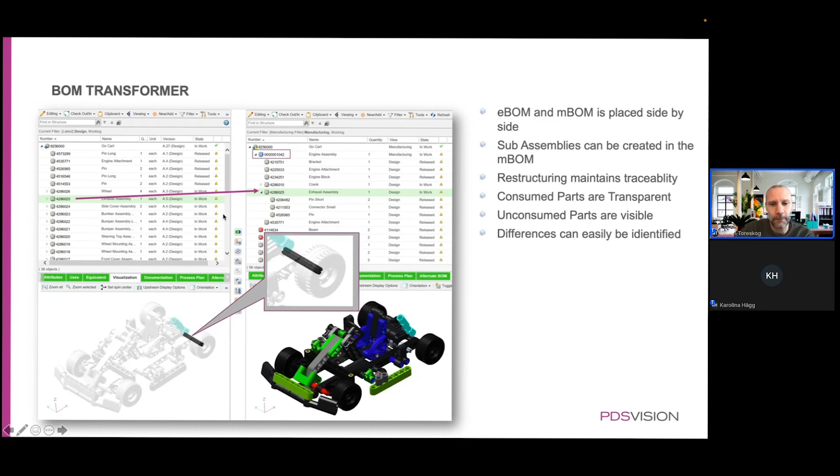Then the process plan. So we leverage the mBOM and have that on the left-hand side here with the visualization. In the process plan, we then add the operations that we want to perform. And then we drag and drop the parts onto the operations. So we have the list of operations, 10, 20, 30, and so on. We have the mBOM on the left-hand side. We drag and drop, and then the parts will show up here, and the visualization will also show up.

When I drag and drop a part, basically allocating a part to an operation, it will be hidden in the visualization, and then I will simply see when I've consumed all the parts, because then it will be empty on the mBOM side.

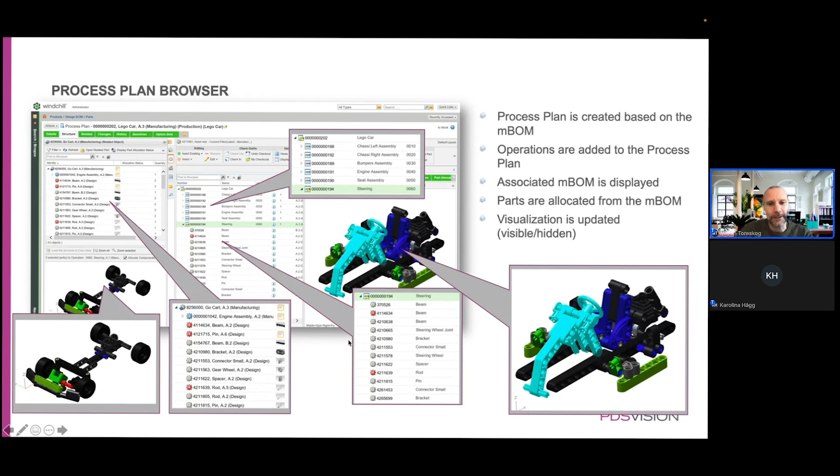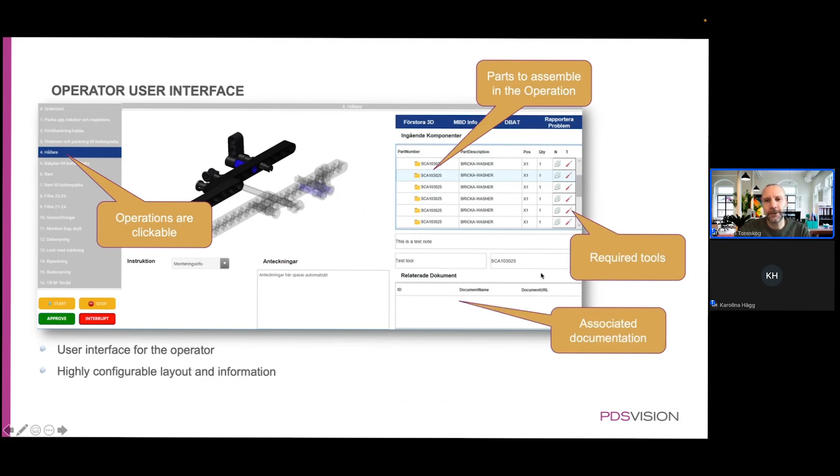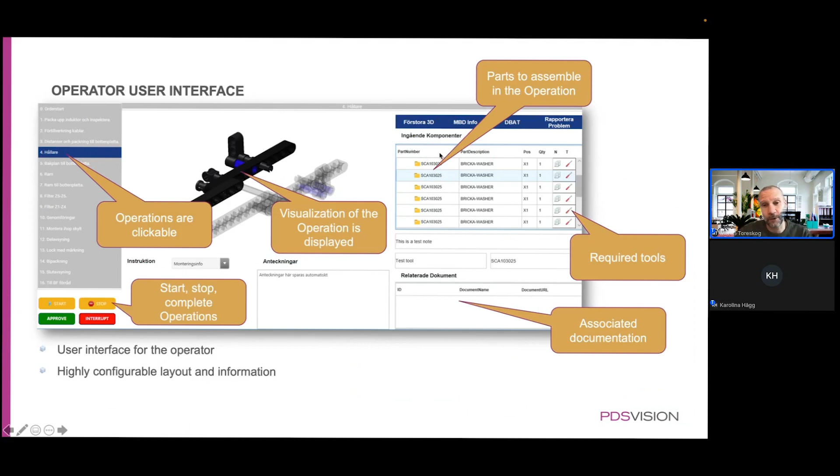The operator user interface. This is a screenshot from ThingWorx, and we have the list of operations that you saw in the process plan. We have the list of parts for each operation. When you click an operation, the visualization will be loaded. You could add required tools for that particular operation. You can have associated documents. You can start and stop the operations, and you can also report problems here. So creating a change notice, for instance, from ThingWorx and start a workflow in Windchill.

So that was the slides. I will now move into the demo part of this session, and I will start by creating an mBOM from an eBOM. So I will use the Lego car that I used during last sessions. I will then create a process plan from the mBOM. I will illustrate some of the operations, and then we'll take a look at the operator user interface. If we have time, let me know, Karolina, if we have time for that. I will also update the eBOM and see how that flows into the downstream processes.

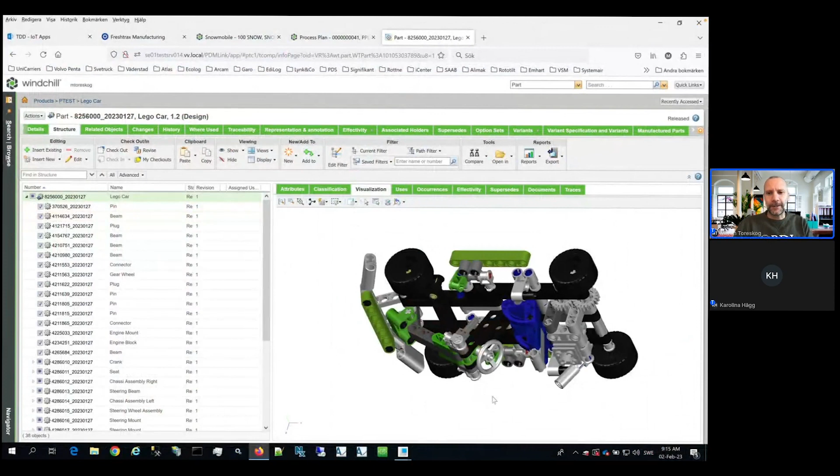So hopefully you can see my Windchill window here. Maybe Karolina, you can just verify that. Yes, it is looking really good. It's a very nice car. Yeah. Yeah, I built it myself.

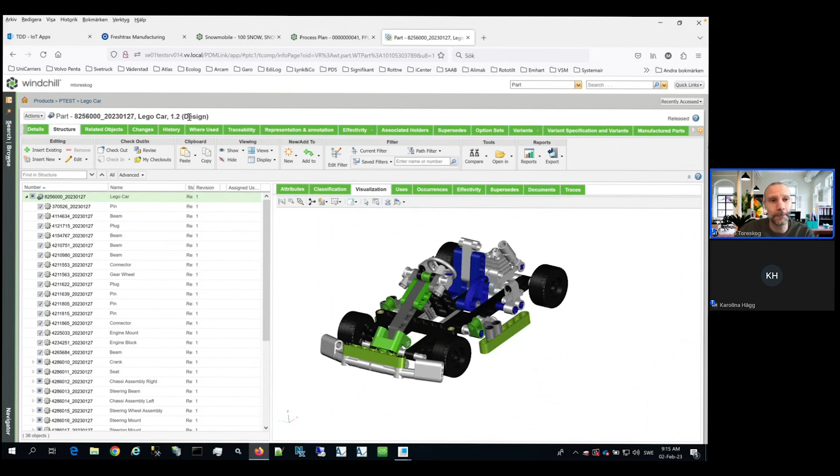So this is the engineering bill of material, and the view here, as you can see, is displaying design. That means that this is the design view of the BOM, which means that it's the eBOM. So I will open this in a separate window, which then allows me to have the eBOM and mBOM side by side. Currently, I don't have an mBOM, so it's empty here, but I have my engineering bill of material, and I have the visualization.

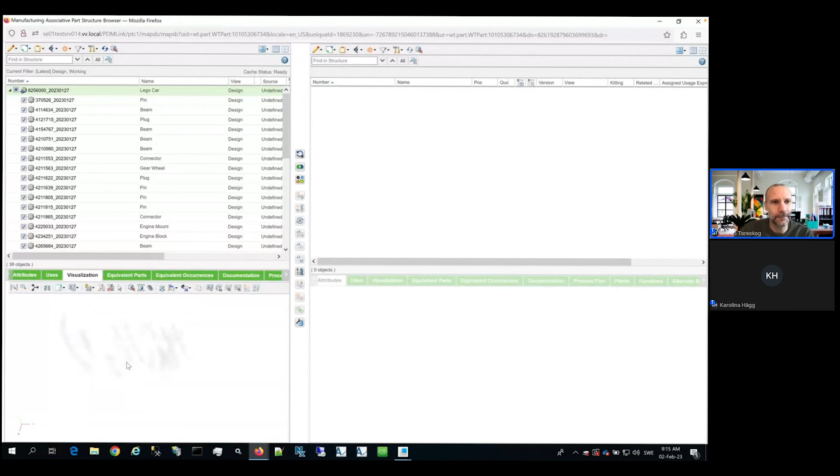If we just wait a second here, and the same thing works here. If I click a part, it will be highlighted in the BOM. If I click a part in the BOM, it will be highlighted in the visualization. So what I'm going to do is right click the top level and say I want a new downstream branch.

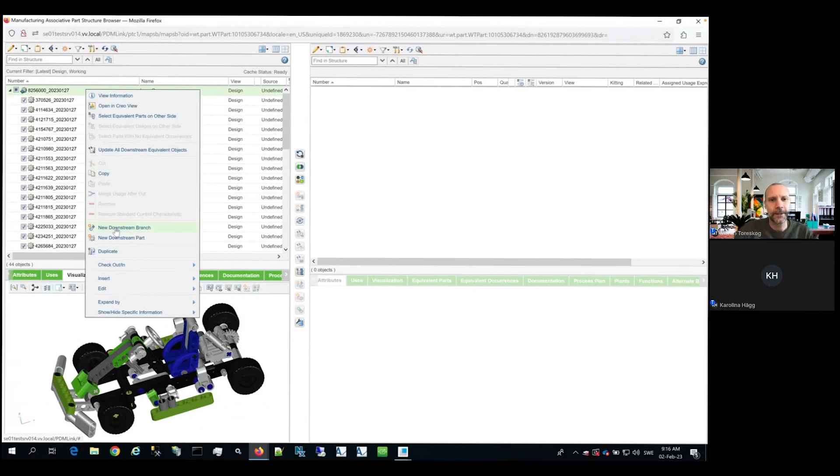Based on my configuration now, I will create a manufacturing view of this. So instead of the design view, I will have a manufacturing view. If I'm working with service bill of material, it will display service here. So I'm creating a different view for service, different view for manufacturing.

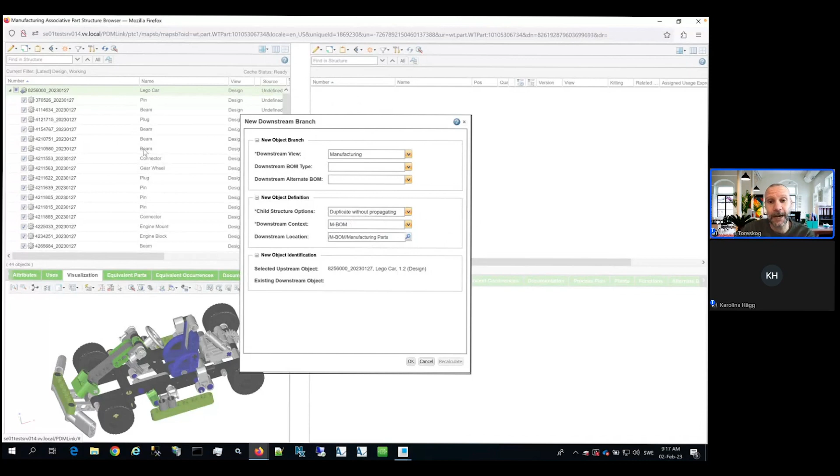When I do this, I have the option to either just create the manufacturing view of my part and skip all the children here. So if I want to completely restructure the bill of material, I can start from scratch, basically dragging and dropping the parts, or creating new parts here and then dragging and dropping from left to right. Or I can start by copying or duplicating the entire structure, which means that I will have an identical structure to start with. And I will actually do that now.

So now I have my mBOM, and as you can see, since I copied the structure, all the parts have been consumed, which means that all the parts are grayed out like this. But on the mBOM side, we can see it's in shaded mode.

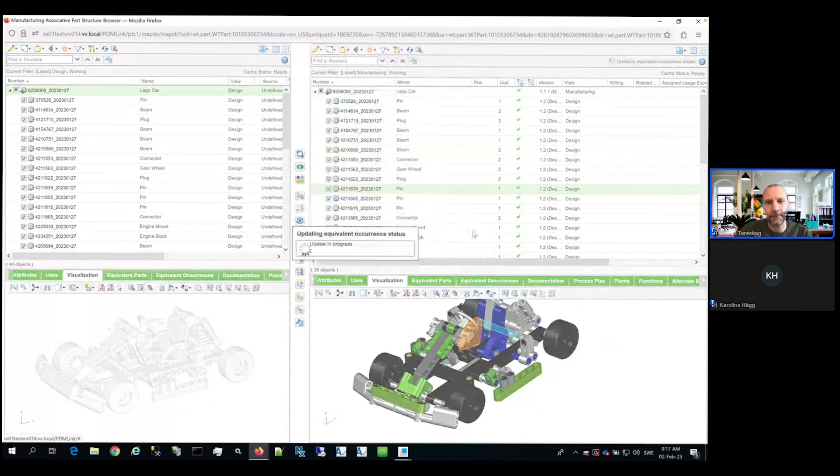So let's imagine that I didn't copy over this part, for instance, or that part has been added after I created my mBOM. So I will simply just remove that part, and we'll see what happens here. So that part simply shows up on this side, which means that this has not been added to my mBOM. So I can click that and then drag that and drop it on top of this one. But I will do a little bit more advanced action here.

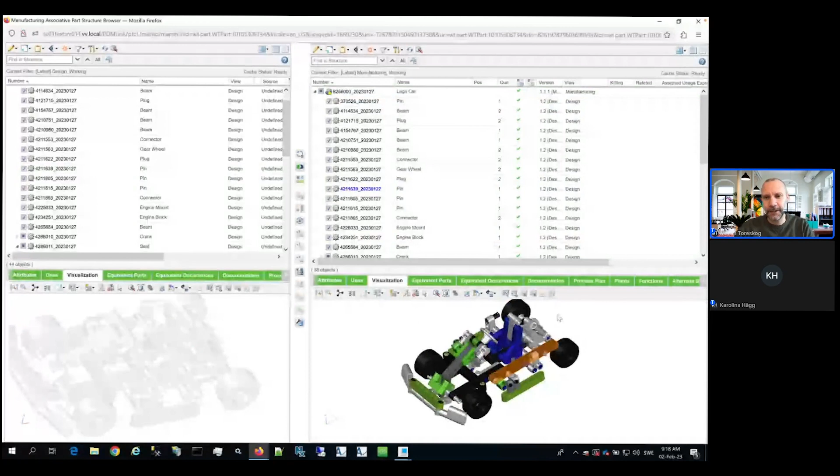So I want to create a pre-assembly of my engine. And as you can see here, the engine block, for instance, is directly below the Lego car. But I want to have that and the exhaust pipe and the crankshaft and so on inside my engine pre-assembly. So I will select my Lego car, insert a new part.

And as you saw in previous sessions, I have different types of parts based on permissions, of course. If I'm a manufacturing engineer, I will probably not have this long list of parts, but potentially only the manufacturing part. So I'll call it engine pre-assembly. And that is then added to my BOM.

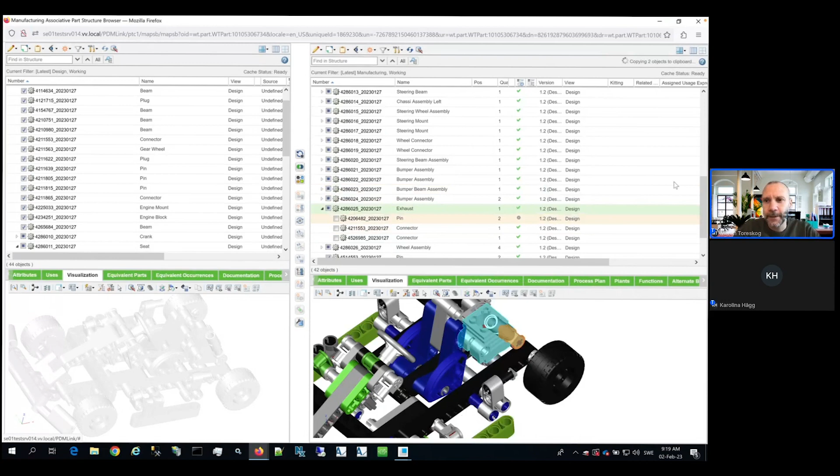As you can see, it doesn't have any children, but what I want to do is then select the engine block, select this part here. Let's see, I want the entire exhaust. So let's grab those. I will cut that from my top level and then right-click my newly created engine pre-assembly and simply paste it there.

When I do this, they're by default hidden, but I can click this to display the parts. If my machine works, now, let me refresh there, and there you can see that they're back. But I will actually deselect those so I can see a little bit more what I want to grab here.

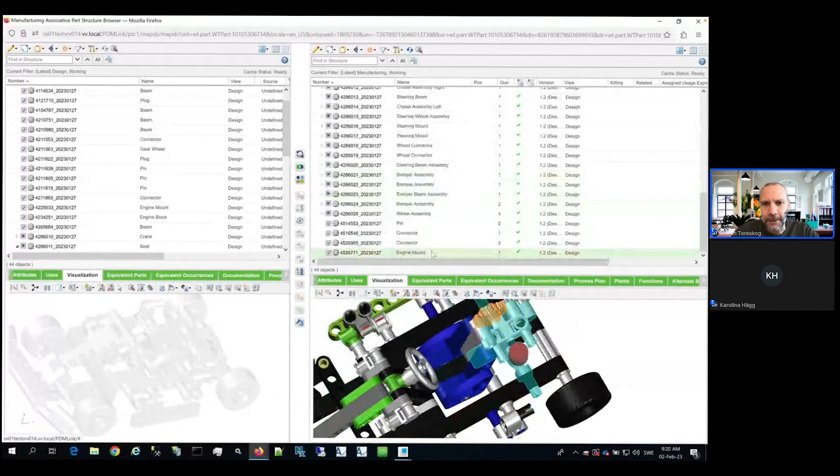So I will take that piston and then take the entire crank, and potentially I want that one, and that one should be included in my pre-assembly. So I will cut that. I can drag and drop them here as well, but I think if it's a long way to scroll, it's easier to do it this way. And then paste it on top of that.

So the purpose of this is, of course, that when I produce the Lego car, I simply take one engine assembly from stock. I don't assemble these on the production line for the Lego car, if we imagine that we would do that. So I would have a process plan for the engine pre-assembly, which defines how to assemble this. And then I would have a process plan that describes how I assemble the Lego car. And then I will use this as an already defined or already assembled component.

If I would select the engine block here, since that has a new parent, it could be interesting to know where that is located on the engineering side. So I can right-click the part and say select equivalent part on other side. So even if I restructure it like this, it still has the traceability that this part is this actual part here.

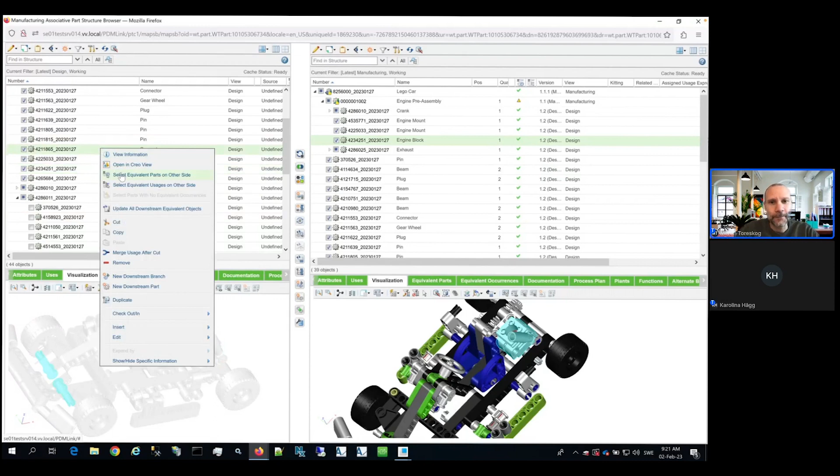And in the same way, if I would select another part here, it will then know where that is located. And this is how it keeps track of the consumption status. So it knows that I have consumed all the parts, and if new parts are introduced on the eBOM side, then I can add those to my mBOM. So I will check these guys in.

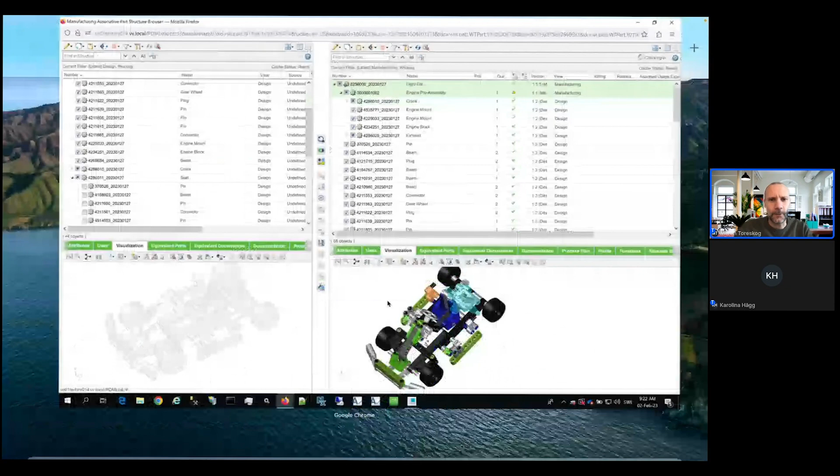So what I did now, if we go back here to the overview, this here was basically the first step. I'm creating the mBOM from the eBOM, restructuring it, but I'm not defining how I do things. This is what I'm going to do in the process plan.

So if I want to create a process plan for the engine pre-assembly, I'm selecting that part. And then I have a process plan tab down here. And then I would have a process plan for the Lego car, of course, to define how that is assembled. So I'm going to create one for the Lego car. Insert new.

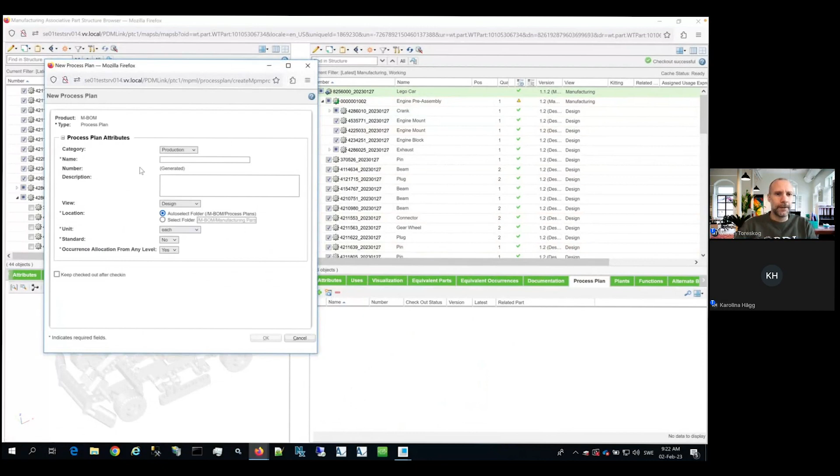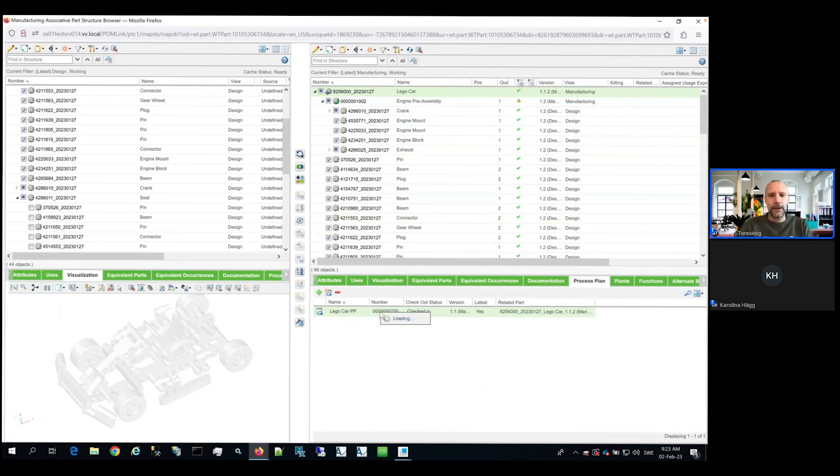Give it a name, Lego car process plan. So now I have my process plan, and as you can see, if I select another part, it will be empty here. So it displays the process plan, or the process plans if you have multiple process plans, for the selected part. And then I will navigate to the information page of the process plan now.

As you can see, it's completely empty. I'm going to open the related part. So by creating the process plan, I associated that to the mBOM. So here I have the mBOM, and if I sort on number here, we should have the engine pre-assembly available here. So my task is now to create operations that define in what order I assemble this.

So we have two types of operation in this configuration, a regular operation and what we call an operation group. So typically in an ERP system, you would not define the operations on the assembly step level, you would have a higher level of operations. So this is what we represent with the operation group.

So let's say that you have different stations or work centers in your production line. That could typically be one operation group. But within that work center or that station, you would perform different operations. So these would be the regular ones. So let's add 4 operation groups. And of course, I don't need to know how many I want. I can create them on the fly as well.

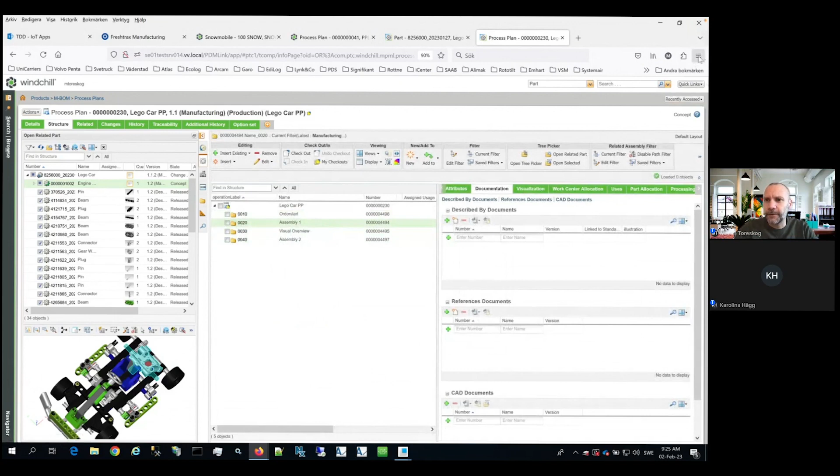I can rename these. So let's rename operations: order start, assembly 1, visual overview, assembly 2, and so on. So let's zoom in a little bit here. So in assembly 1, I want to add the actual assembly steps. So let's say I have 5 steps here. And of course, I can rename these as well.

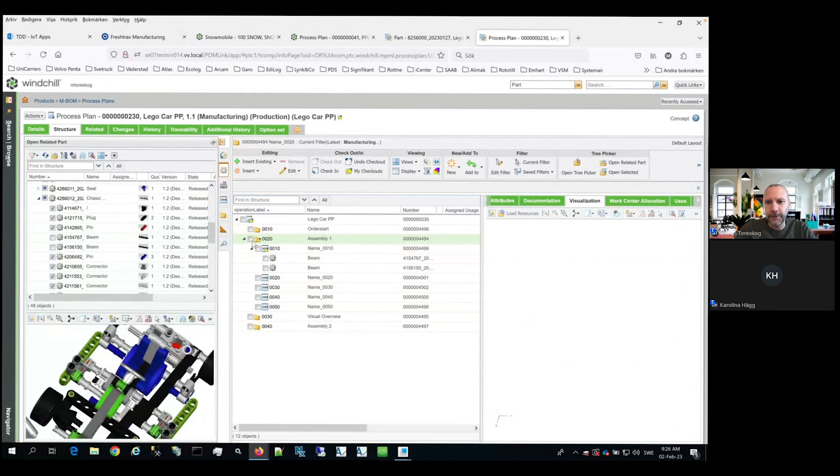So what I'm going to do now is select the parts that I want to assemble in the first step. So I'm selecting these parts, dragging and dropping them onto my first operation. And as you can see, they are hidden from that side. And if I turn on the visualization here, they will show up on this side. And then I probably want that part in the same operation.

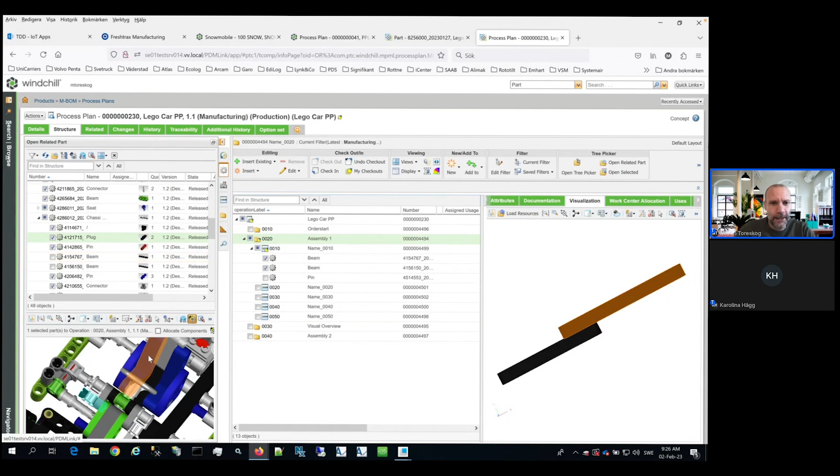And if I select that part, if you take a look at this in the BOM here, I have 2 plugs. So if I would drag that over to the operation, I would actually get 2, but I want a single one here. So I can either display the BOM with occurrences, as it's called. Then it will split those 2 plugs into 2 rows. Or I can select the operation, select the part, and then say allocate. And then it will simply add only that part and not the second one.

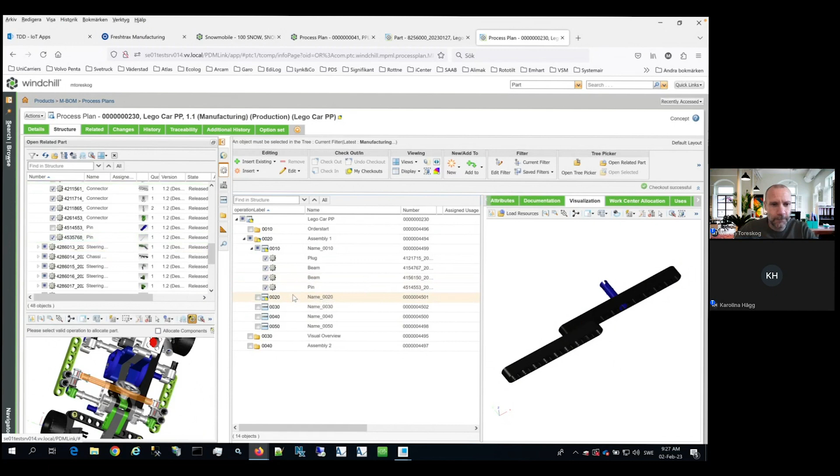So these are the parts that should be assembled in the first step. Then I will add that one and that one. Those should go into the second step. Like that. And then I'm not going to do the entire Lego car here, but I think you get the point that this illustration would then describe how I assemble these 4 parts. And then the second step will be to assemble this and so on.

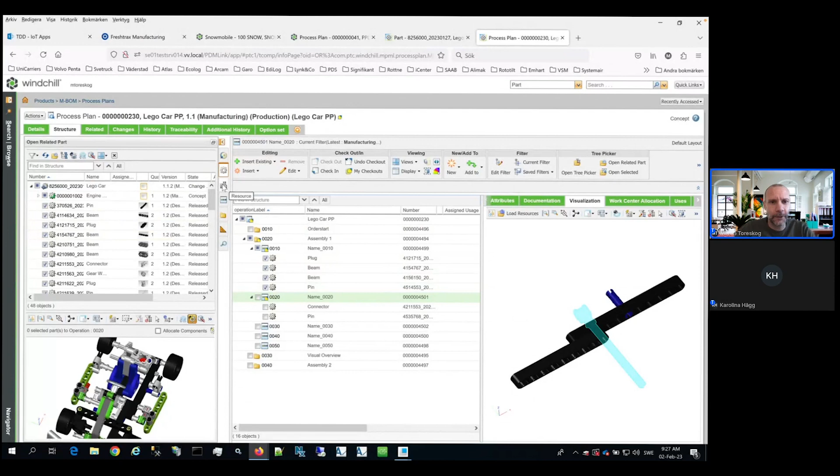It's also possible to add tools and fixtures and so on. So I'm going to click the plant icon. And here I've created sort of a library with tools and fixtures and work centers and so on. So if we just imagine that we need a drill to perform this, I will simply drag and drop that onto my operation.

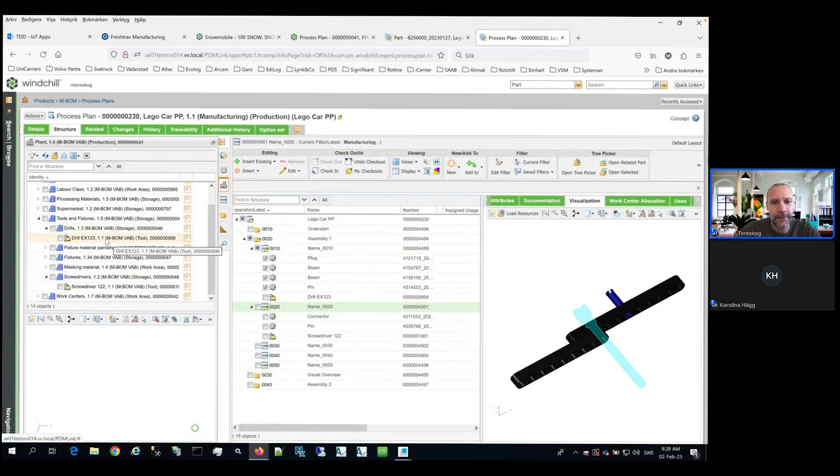And perhaps I need a screwdriver for the second operation here. And of course, if these have a 3D representation in Windchill, then those would show up here as well. In my case, they don't, but yeah, these are actually regular parts. It's a different type of part. So I'm going to minimize the browser there.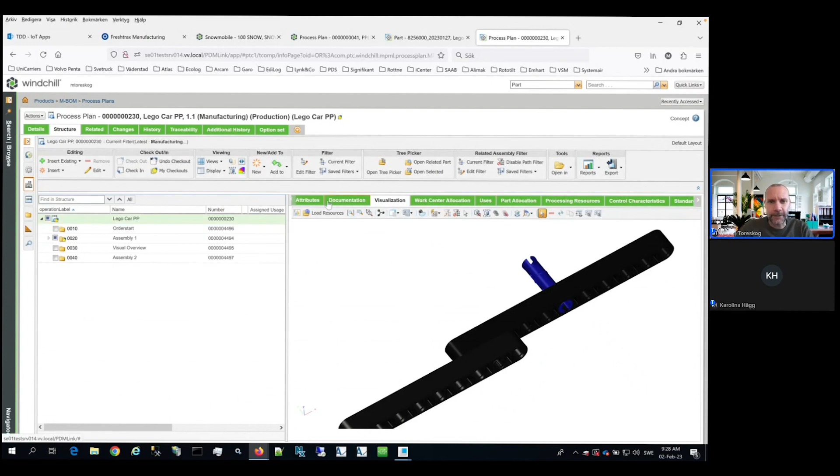And if we take a look at this level here, for each of these operations, I can add additional descriptions, and I can add some formatted text with bullet lists, and so on. So you can also add documentation to this. So if you have a safety instruction or whatever, you can simply add that to the documentation tab here.

You can also define the time required for these operations. And of course, you decide on what level you want to do it. So let's say that the routing in the ERP system may be only defined to this level. So this would be the only thing that we would publish to the ERP system. Then we would probably define the time on this level. But if the ERP system can manage the lower, more detailed levels, we can add the time to these as well.

So I'm going to scroll here. Here we have the setup time, the labor time, the processing time. There are more time attributes that you can add, and you can of course remove them from the layout here if you don't use them.

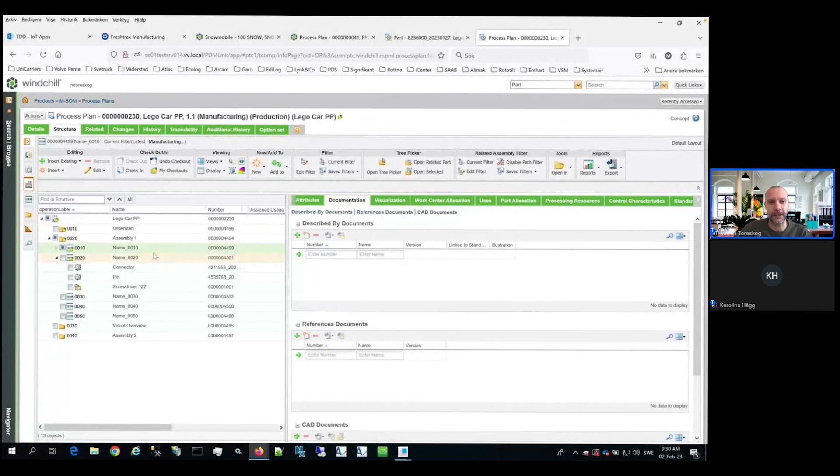So if we take a look at my PowerPoint again, this was the second step of the process. I have defined the operations. I've allocated the parts. The next step is now to create the illustrations. As I said before, if I have existing photographs or images that describe this, I can simply add them as documents to my operations. But I can also use Creo Illustrate to generate these illustrations.

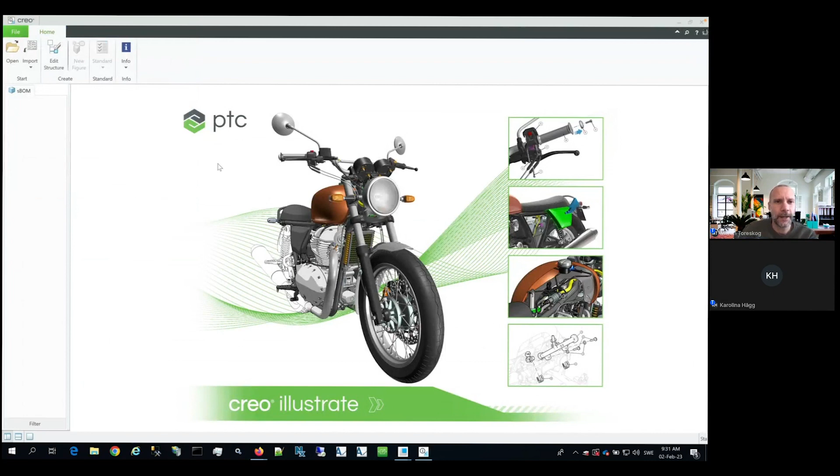So I'm simply going to right-click this operation and say New Illustration. Now Windchill generates a 3D model based on these 4 parts and potentially tools and fixtures and things like that. And then it will prompt me to open Creo Illustrate, and I will log in to that. I'm not going to go into detail about Creo Illustrate. We can do that in a separate session.

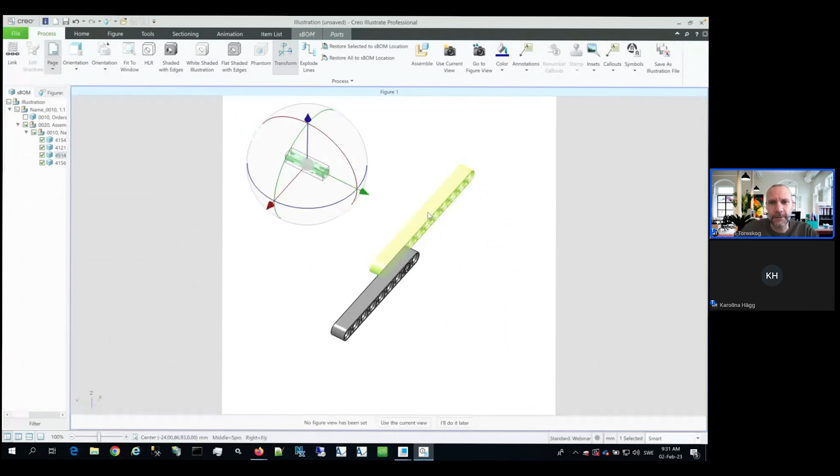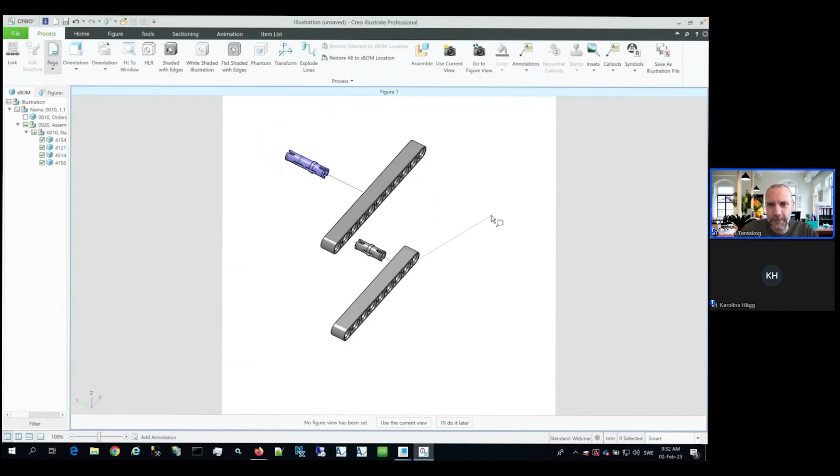But what we're basically doing here is exploding the parts. So let's say I want to move this guy a little bit that way and this guy there, and then have an explode line. Let's move this to there, add some explode lines. And then perhaps, just to clarify that it's actually that hole it's going to be inserted in, I can add what we call an inset. Yep, so let's keep it that way. And then I will simply save this.

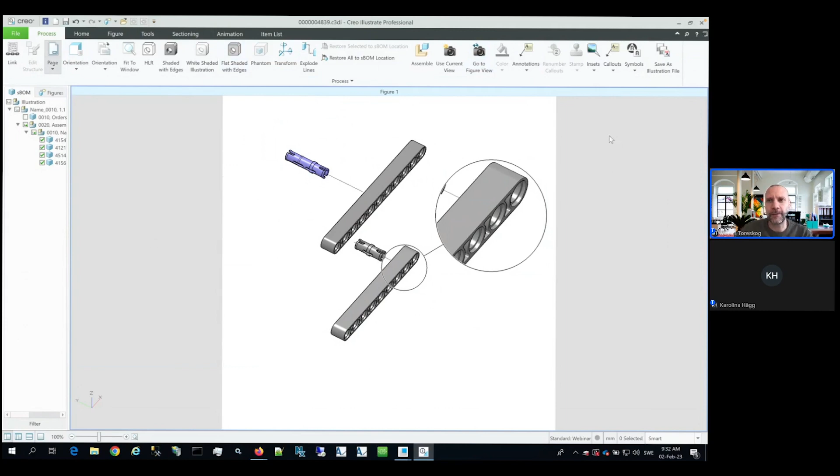So what Windchill will do now is store the 3D representation of this illustration along with an image file. So if I go back to the process plan now and select this operation, I may need to refresh this. We can see that it has added a document to this. This is the image of the illustration, but also the 3D representation.

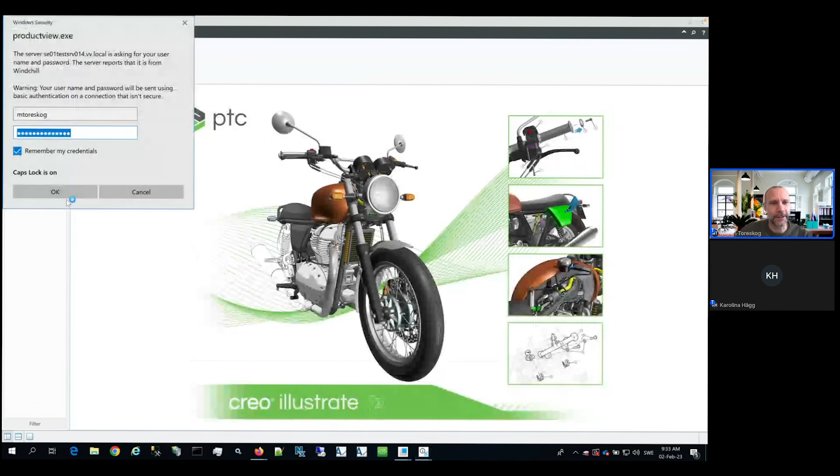I'm going to create one more illustration here, just so you can see that all the parts that have been previously assembled will automatically be grayed out in Creo Illustrate, so you can more clearly see what to focus on, basically. So create. So here you can see that the parts that I already assembled are grayed out.

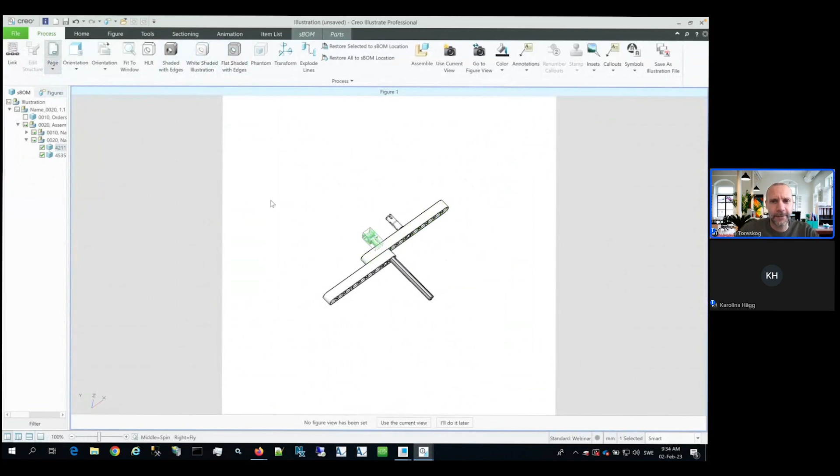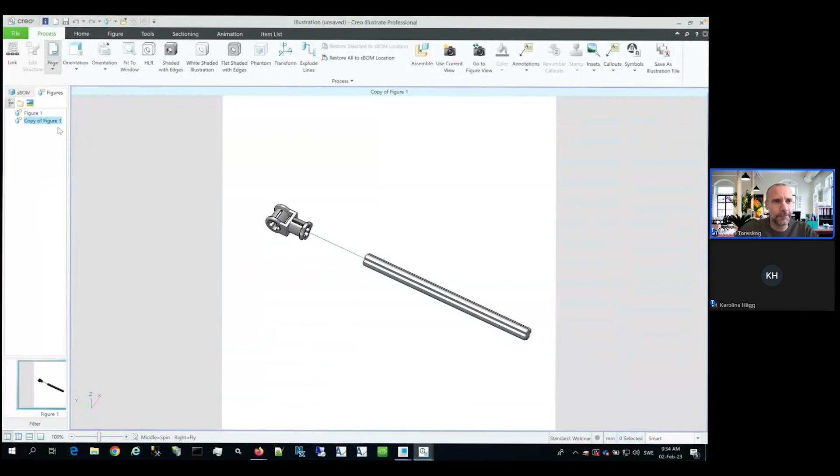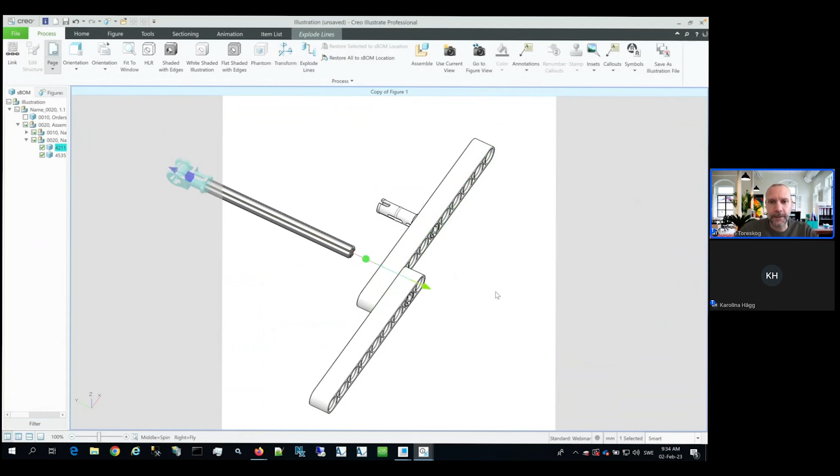I'm going to do this. Let's say that the first step here is actually to put these two together. So I will simply do this, add an explode line, and perhaps something like this. But then I want to have another figure where I display how I put these together. So this should be restored, and then I will simply move these guys out like this, add an explode line to that. Oops. Like so. So now I have two figures describing this one and this one. And I will save that.

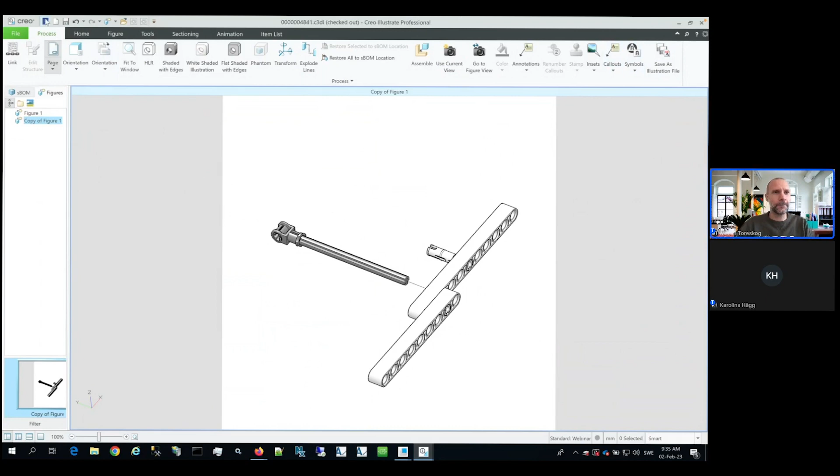And once it's done, let's see, it's still saving up here. Give it a few more seconds. There we go. So if I now refresh this, I will then have a document associated to this operation as well.

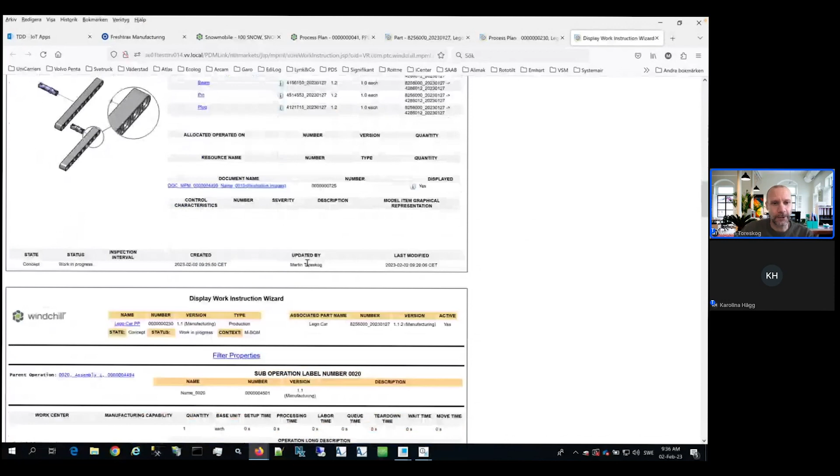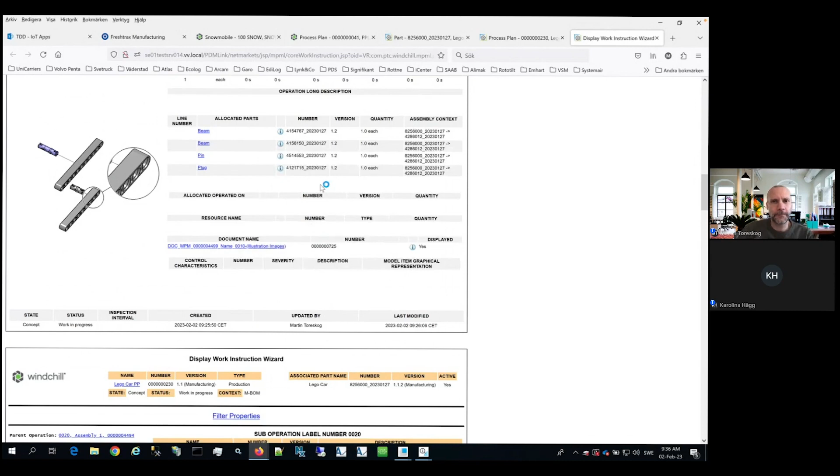So if I right-click my process plan now, and I'm aware that this is not completed, but hopefully you get the idea, I can generate a work instruction. That generates an HTML page with the illustrations I've created, along with the parts that are used for that operation, and the required tools and so on. In this case, I had two images, as you saw. If I click this, it will actually open that in Creo View. So I can view that either as the image or the 3D.

So this is the third step. And as I said in the beginning, all of these steps are associative to one another. So changing the eBOM will update the mBOM, or I can easily identify the parts. And of course, I need to define where it belongs and add additional parts to my process plan. But if I modify an operation by adding another part to it, I can simply update the illustration. So everything I've done so far will still be there, but additional parts will show up.

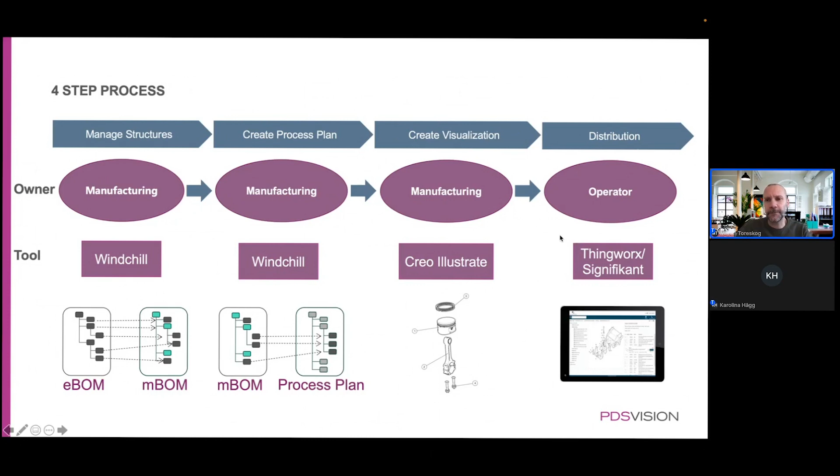The fourth step here is to either use the built-in work instruction as you saw, or what I will show you now is, let's see, the possibilities that we have with ThingWorx. Let's see if this works now, I had to restart my computer before this session. Let's see if it loads.

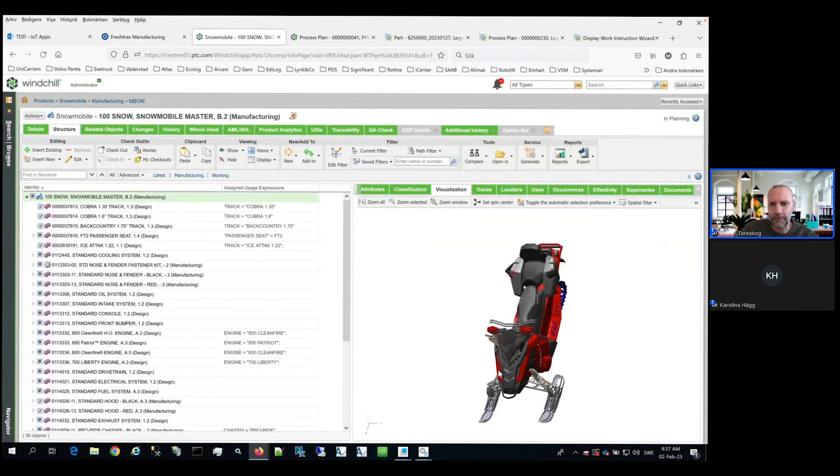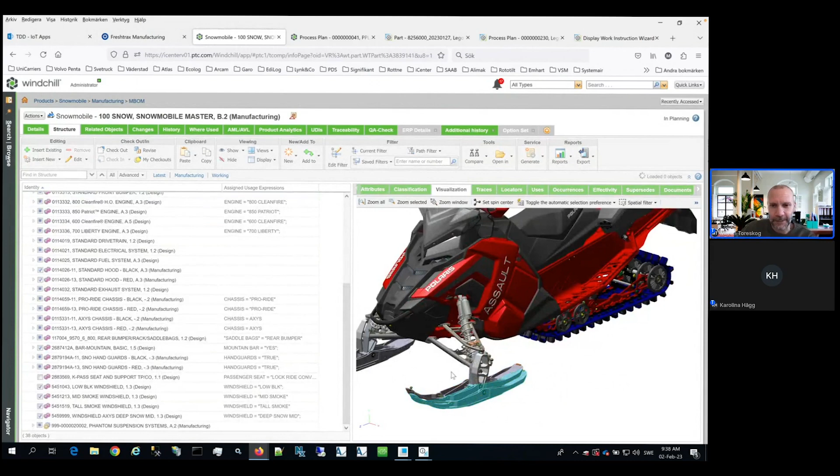Yes. So what I'm going to show you is an example of a company called Polaris that develops these snowmobiles. They have configurable products, so they use options and variants to filter the BOM. The process plan I will show you is for one of these suspension systems with the skis and so on. So the process plan looks like this.

So this is a pre-assembly where you start by adding that one, and then you have some new parts here and so on. And this can then be published to ThingWorx.

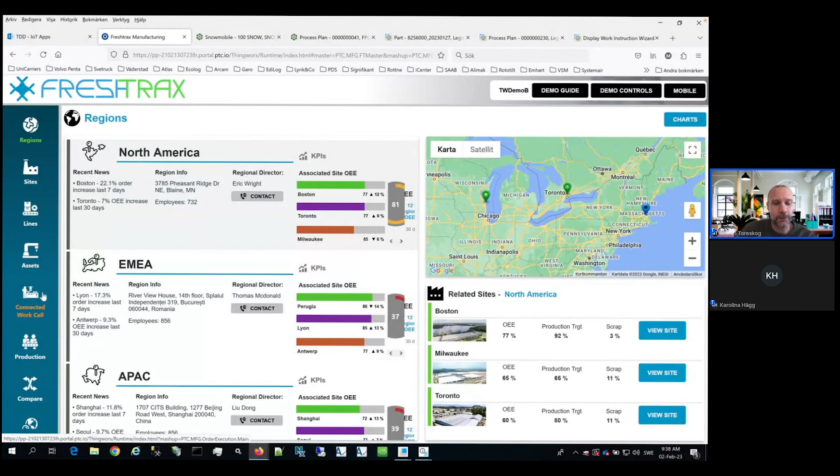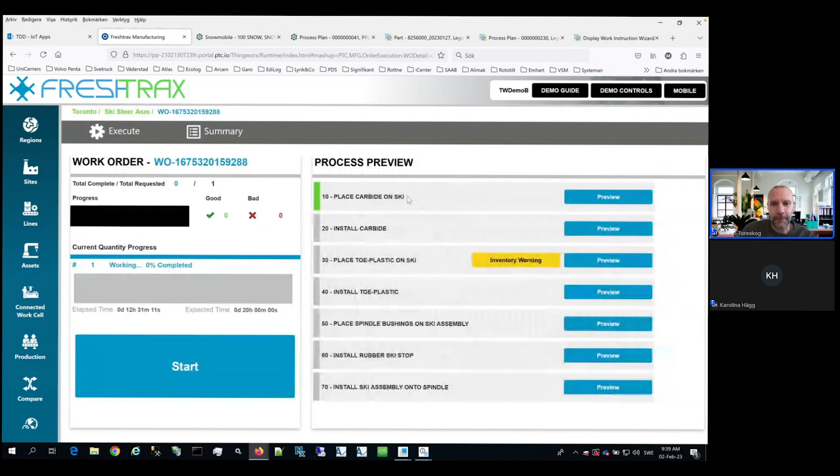ThingWorx is an application or a platform that you can use for many things, but you can use it for connected work cell, where you can define your work orders and then find those, and then all the information that is defined in the process plan can then be displayed here. So here are my work orders. I can view that. I have the assembly steps, which is what you saw here.

I can start this. That could then potentially send a request to the ERP system that starts the operations there. And let's see, hopefully this loads now. So here I have my operations. Operation 10 will then be the first step here. And then all of this information is defined in the process plan. I have the parts that are used in that operation.

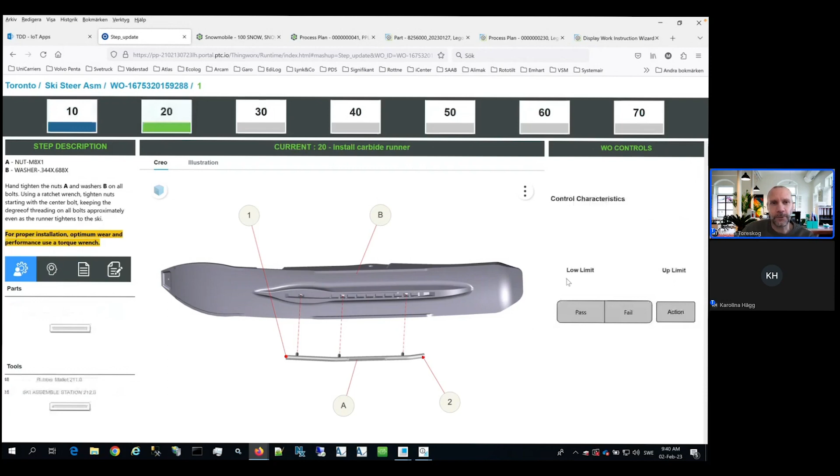I can say that I'm done with it or that it didn't work. So let's complete that, and then it will move to the second operation. In this case, there's a tool that's connected, so I can simulate the torque, for instance, needed for that. I can say that the torque was that, and then move on to the next step.

So defining the process plan, you could basically consume that in different ways. So you don't have to use ThingWorx, but that's a potential that you can do.

So what's the time, Karolina? Is it question time? It is question time, but I think we can squeeze in Väderstad as well. I think it's a nice addition. You mean what I said, if we have time? Yeah, exactly. Let's see, since I restarted my computer, I just need to log on here again. So what I thought I would do is, let's see if I have my Lego car here. We can take a question in the meantime. Yeah, that's good. So we have this question.

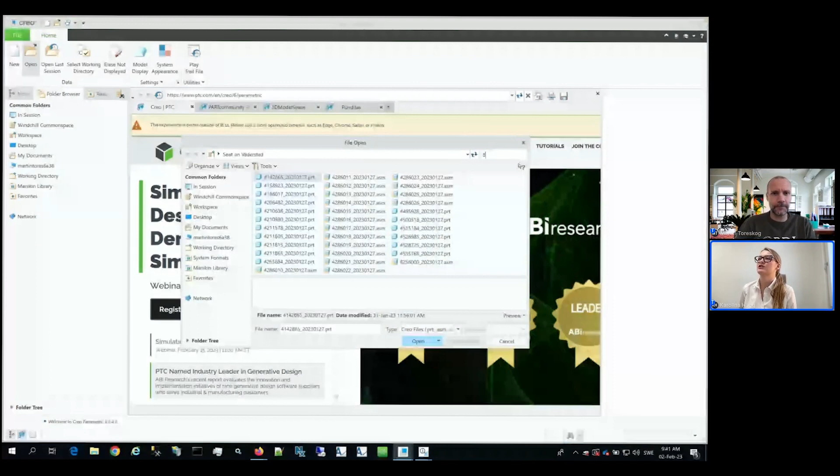What are the benefits of managing the mBOM in Windchill compared to managing it in the ERP system? Yep, that's a good question. Typically, some ERP systems have the support for managing eBOM and mBOM. Some don't. So then you only have one BOM, and that needs to be the mBOM, which the result of that is basically that either engineering needs to create the assembly levels that are needed for manufacturing, or on the

manufacturing side, we need to create these, of course, in the ERP system, but there's no connection to the source, so to speak. So you basically need to go into Windchill or whatever PLM system you have and compare them, because the eBOM will change, and there will be quite a lot of work with maintaining the mBOM and keeping that up to date.

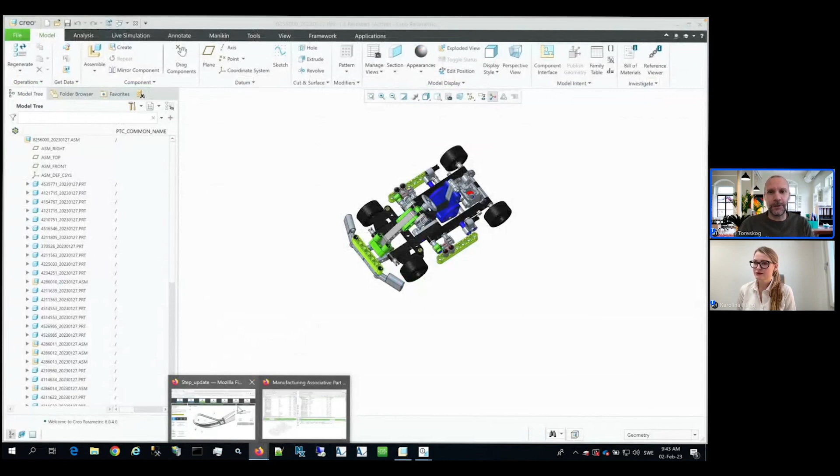If they have support for this, and some do, as I said, we've actually heard from ERP vendors when they saw what we're able to do here with a 3D connection and so on, that it's difficult to compare the possibilities when you have the 3D visualization, because if you imagine that you would define the process plan in the order in which you assemble stuff, if you don't have 3D to see what a part is and what parts should be in what operations, you end up sitting with the 3D model perhaps, or the 2D drawing, to see what parts should actually go into each operation.

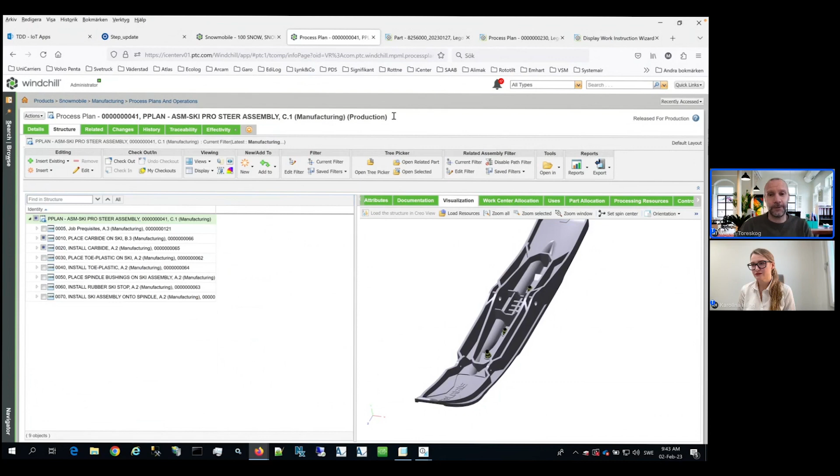So of course, having the 3D and having this sort of digital thread between eBOM, mBOM, and process plan is a huge advantage, I would say. So hopefully that answered the question. Definitely.

You can. I will just open another assembly here. So if you have another question, we can take that.

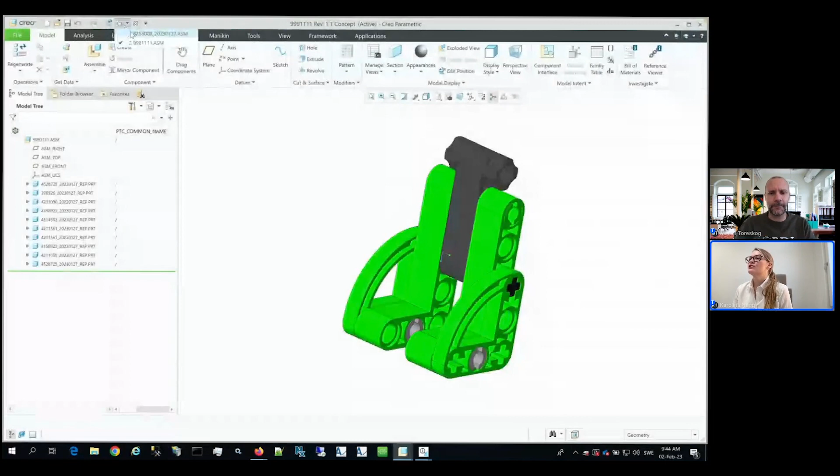Absolutely. So how do you manage multiple production facilities, for example? Yep, that's a good question as well. So here we have the manufacturing view and the design view. If you have multiple production facilities, it's often the case that you don't have the same production line, and you may assemble products in different ways. So the mBOM and the process plan is not necessarily identical.

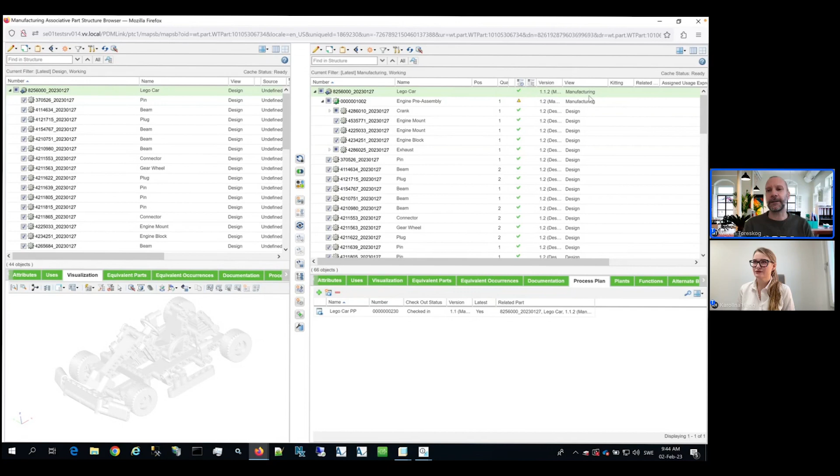Then you could have different views. So it's possible to define plant A view, plant B view, and so on. And based on the same engineering bill of material, you can then create different views for each plant. If, however, the mBOM is identical, you could use the manufacturing view, but it could be the case that some metadata of the parts are different.

Then it's possible to define what we call extended data. So to the same part, you can actually associate a metadata object, if you will, that makes it unique for that plant. So let's say it's a make component in one plant, but a buy component in a different plant. Then that information can be different for the different plants.

But the structure, you don't have to create and maintain two bills of materials. And of course, if you have one or two plants, that's doable. But if you have 20 plants, then it will be a challenge to maintain as many BOMs as plants. So that could be a useful feature as well.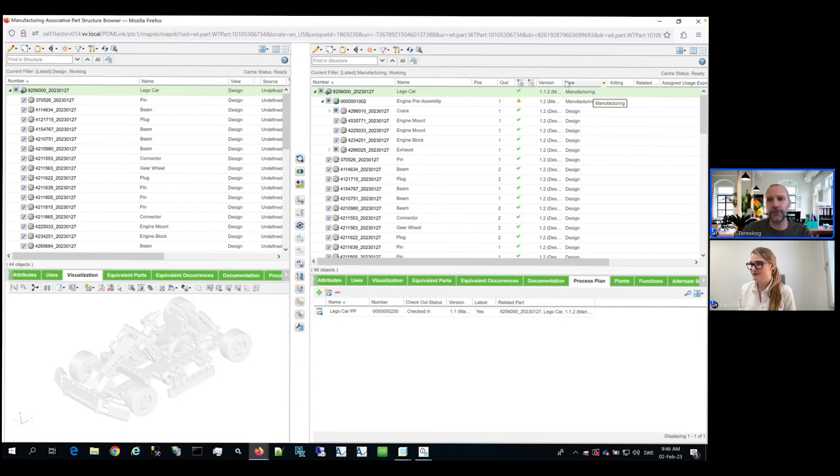Yeah, but different views is one option. So maybe I should just do this. So what I'm intending to do is replace this seat in the eBOM. I did this during last session, but I will just show you how this looks on the manufacturing side. So I'll replace it with this new seat. And if you joined last session, I simply did a mapping between the assembly references here. Don't have to focus on that too much now. I'm just going to do it.

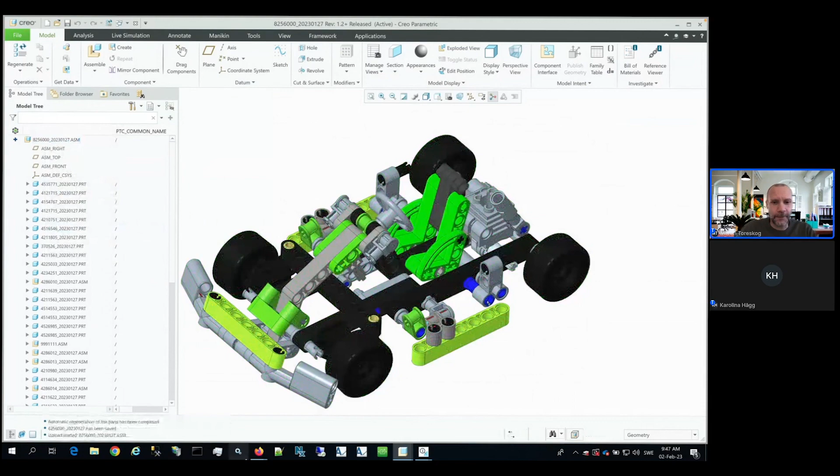So it will check out my top level assembly. If I want to, I can revise that, of course. Now I'm just going to do a simple checkout. Now I have my new seat, and that contains a lot of new parts in it as well. So we'll check that into Windchill, and I will then go to my eBOM. So this is the design view that will then contain my new seat.

Yeah, I will open that in. It didn't look like it there. Let's see if the check-in succeeded. It was just a glitch, I think. Let's see here. There we have my new seat, and here I have my old seat.

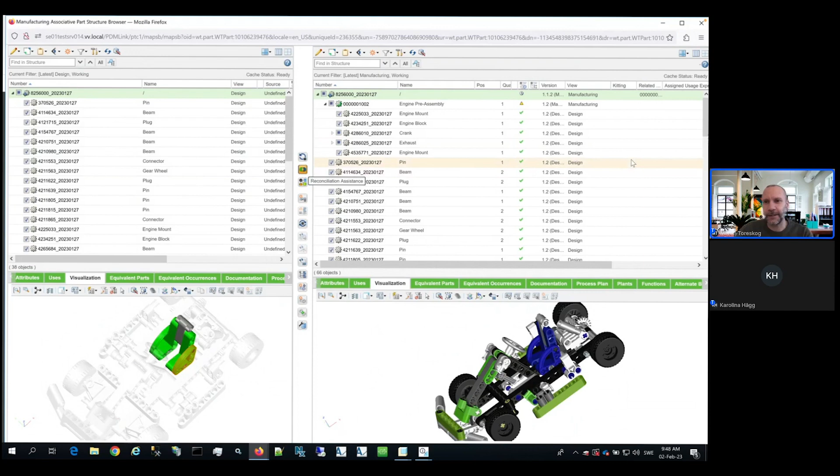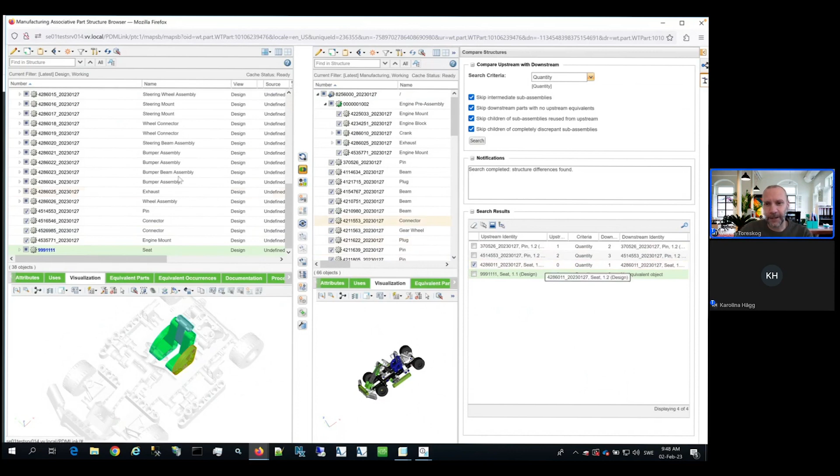So what I'm going to do is turn off the status of the parts, and then we can see that this seat is missing. I have the option to compare these structures as well, to identify the differences between them, part by part. So here I can identify that this seat is on the upstream side 1, on the downstream side 0. So it highlights that particular part. This seat has 0 on the upstream side, engineering side, and 1 on the downstream side. So I can either see it in the 3D or compare it part by part.

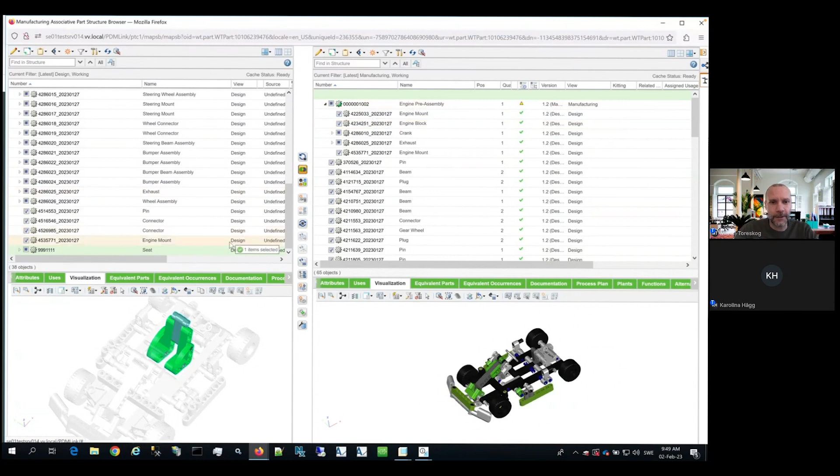So my task is basically to remove this guy and then add the new seat, and I will add that to the top level here. Let's see if I just refresh that quickly. Add that new part, and then the BOMs are up to date again. And of course, if this was used in a process plan, a similar fashion would be used to update the process plan and drag this to the operation where it belongs. Good.

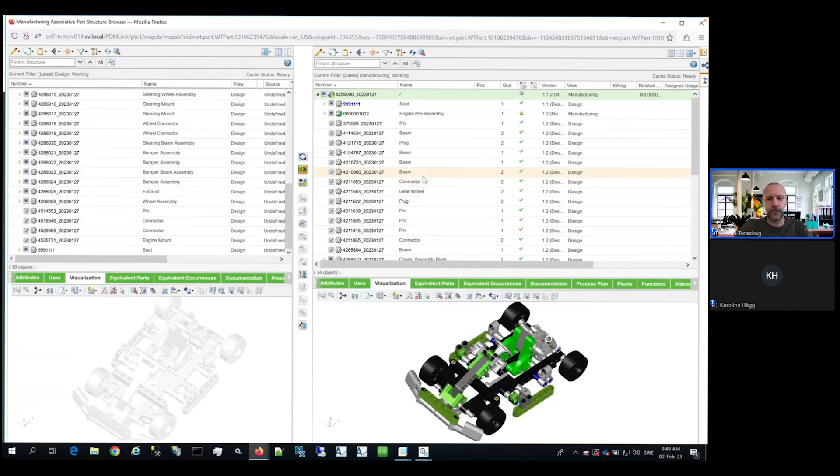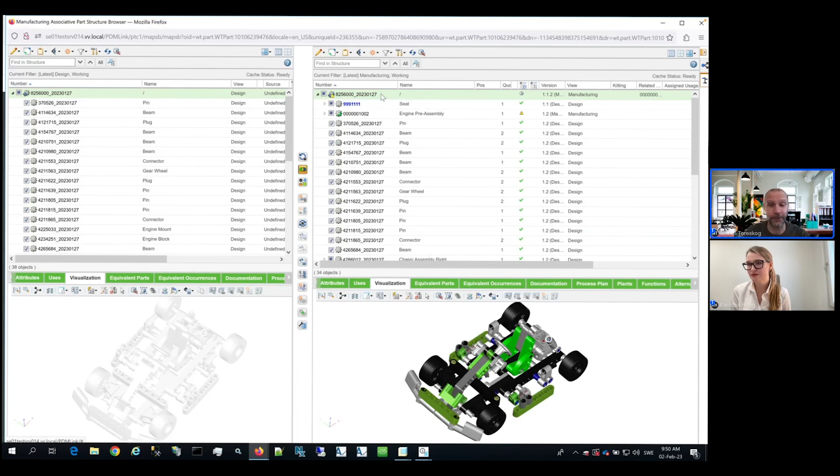So the last question is, if you manage the mBOM in Windchill, how do you define when a change is introduced in production? Yes. So typically, if you have a change process that drives the change, if you don't have the mBOM, of course, you would do all the engineering work in regards to that change. But if you have the mBOM as well, then that can also be included in the change, of course. And if we take a look at, let's see if I have something here.

Typically, you would define a sort of phase-in date. When will this part be introduced? A date or a serial number when a part is introduced in production. In the change process, it's possible to define what we call effectivity, which is basically the introduction date or the phase-in date. And that's how you typically do it in the ERP world as well. You set a date when a new part number should be introduced and so on.

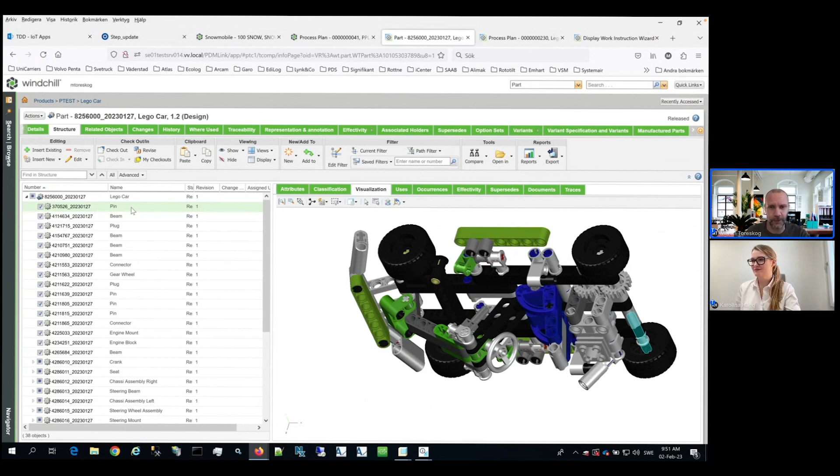And that could be defined manually on the part, but it could also be driven from the change notice. If you have multiple parts that are introduced, you can set that effectivity on all the parts in that change notice. I think that should answer the question. Some companies actually define it in the ERP instead. So we push the mBOM, we push the process plan to ERP, and then in ERP they define the phase-in date. But it's also possible to do in Windchill.